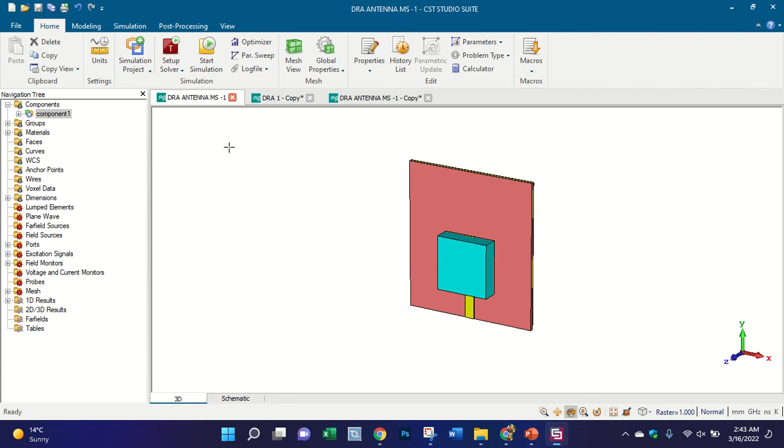Like Gerber viewer. Yes, yes, I have. Yes, thank you. I will share with you.

Okay, don't worry. Okay, so first let us see for which design I am talking about the patch antenna. Okay, let us remove these files. We open any patch file. Okay, so suppose we have this one. Okay, we want to import, sorry, export the Gerber file of this design.

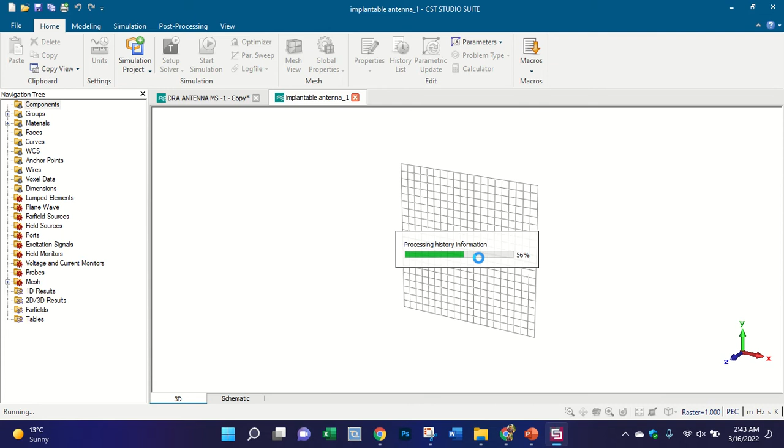Okay, so we have some options. Sometimes the fabricator will ask or will demand different files. Okay, so you need to provide what he wants exactly. Okay, so first, this is your antenna. This is your front view and this is your back view. Okay, so first you can reduce the skin, because we don't need skin right now.

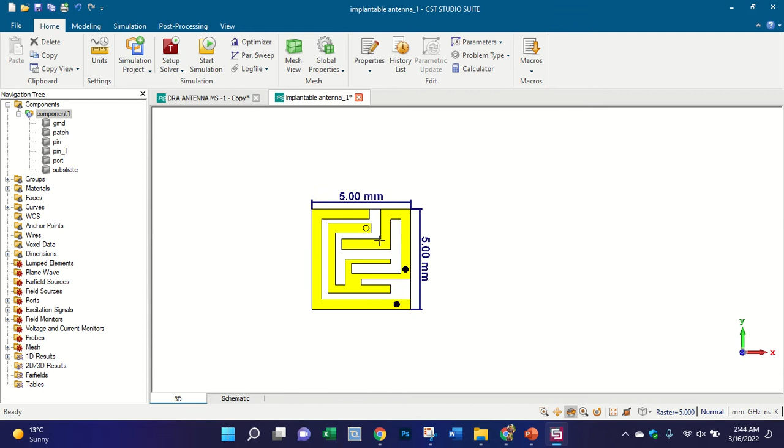Also the port. Okay, so you need to check where your port is. Your port is at this position, and your shorting pins at these positions. Okay, so when you want to send your design for fabrication, you need to do the following steps. You need to open the Word file or Excel file. You need to save your results. I mean, you need to explain your design first. Like, this is your shorting pin.

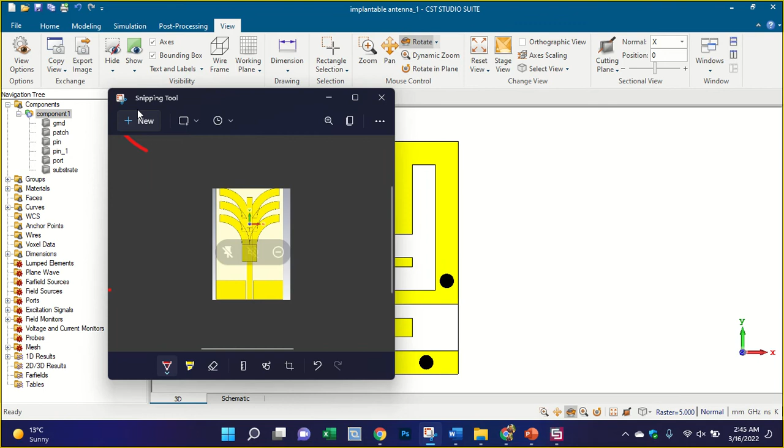Okay, pin, where is the pin, port? Yes. Okay, so this is the port. Wait a minute. Okay, so you take a snap of this design. Okay, wait a minute. Okay, so take snap, save results. I mean, this is the front view. You need to explain your design to the fabricator.

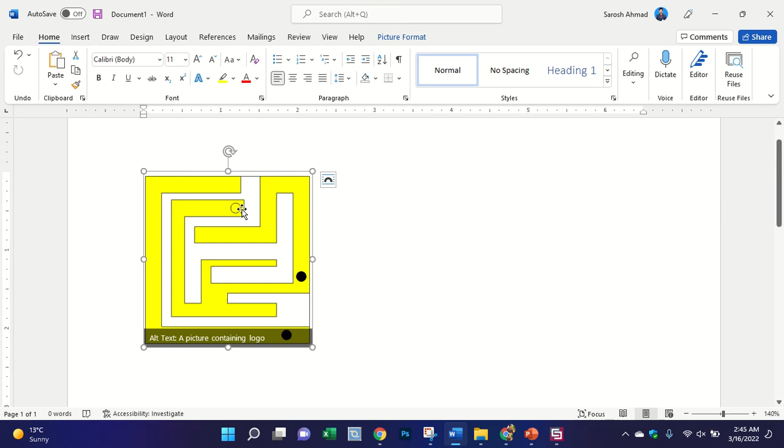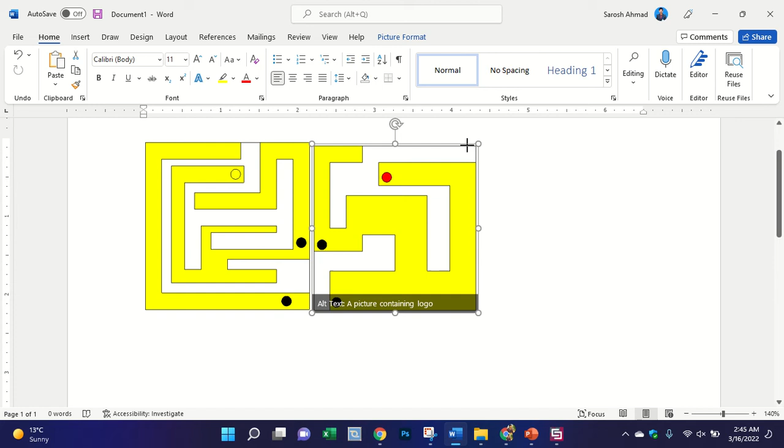To tell him that the black color are the shorting pins, and this one just change its color, like red color, to show him that this here is the port. Okay, so for the other thing you can also show him the back view. So first you need to explain your design in a Word file, to tell him that you have this design. Even if you send him the Gerber files, he cannot understand your design exactly. So better to send him a Word file, or sorry, PDF file separately to explain your design.

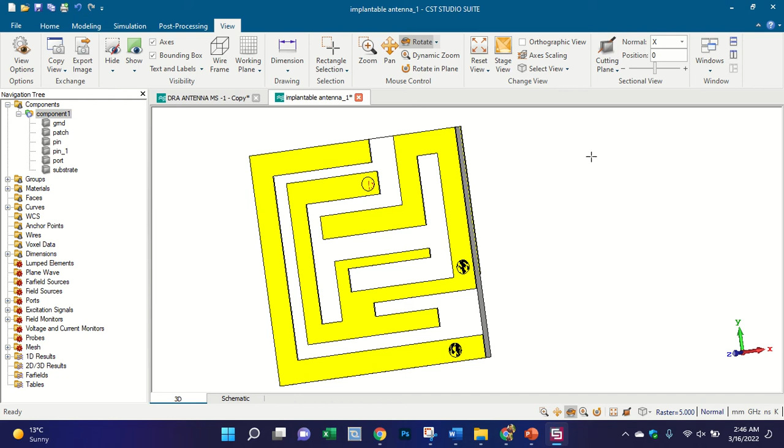Okay, so now we want to prepare the Gerber file. For that you cannot export the Gerber file of the shorting pins and the port. You need to remove the port, but if you remove it, it will not be visible. So it is better if you subtract the shorting pins and the port from the design. Like, you have this patch, you have a ground plane. Click on both together, then click the minus button on the keyboard, then select the port and the pins. Press enter and you can see there is a hole.

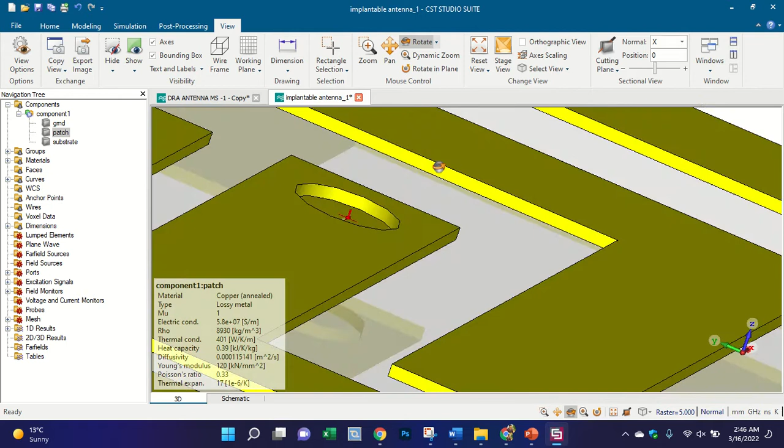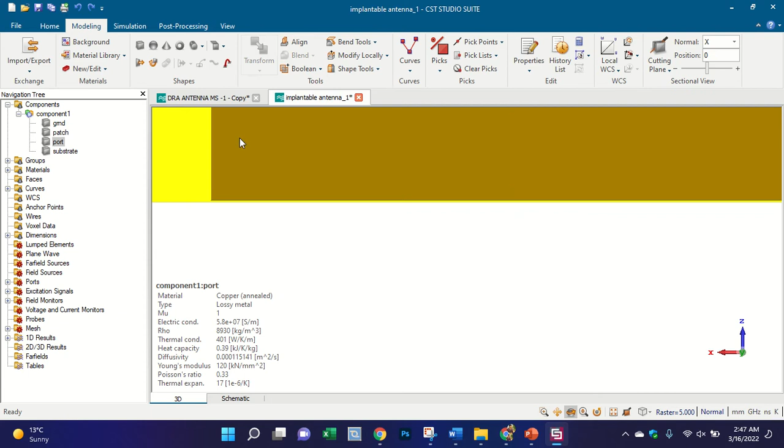Now you can see here in this case, this is not properly subtracted. So you can undo, press Ctrl Z, to subtract properly here. Okay, so this is the port. Let me check whether we are able to. Or you can even take any size you want. Okay, add both, press enter. Also make it thicker.

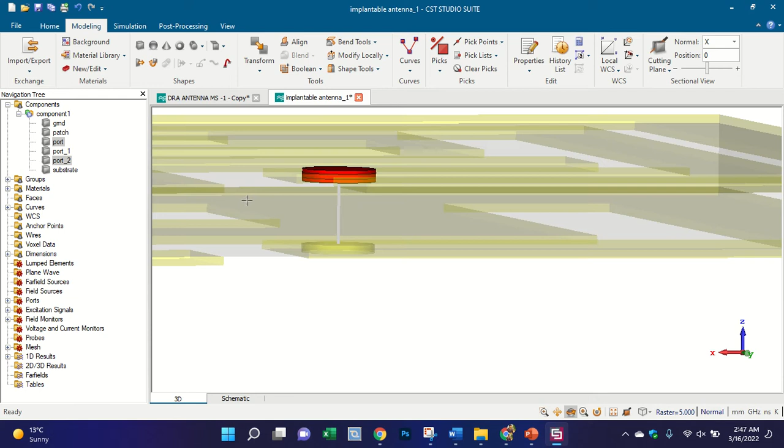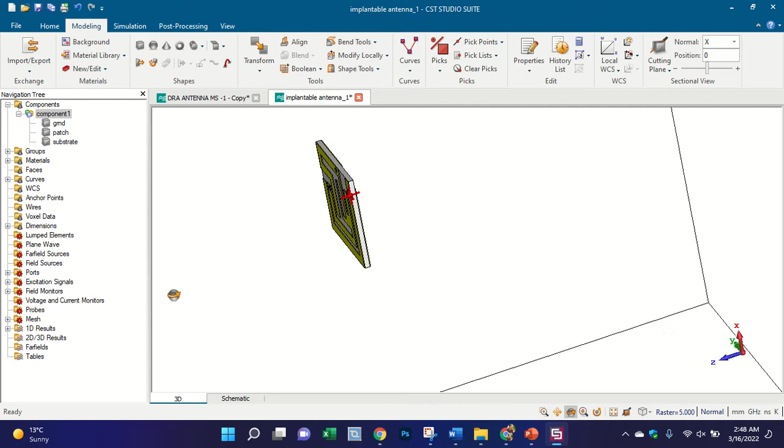Okay, so this is your shorting pin now. You can cut it from the patch and the ground. This is your patch, this is your ground. Select together, press the minus button, then select the port, press enter. So now you can see the hole in your design. Now you can explain to your fabricator that this is your shorting pin, these wires for the shorting pin, and this one for the port.

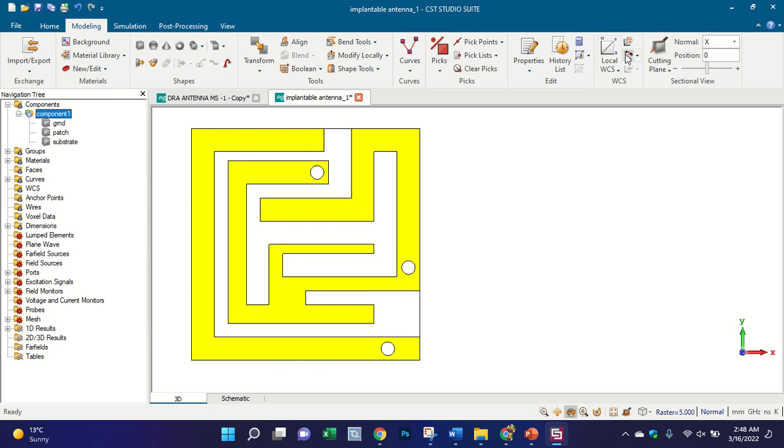Okay, so the next thing is that we don't need a substrate here, so we can even remove the substrate. But you need to align your WCS at the center of this substrate. Now go to import and export. We need export. So we can go to the 2D files. Some fabricators ask for DXF files. So you can click on it and press enter, and you can see the outline.

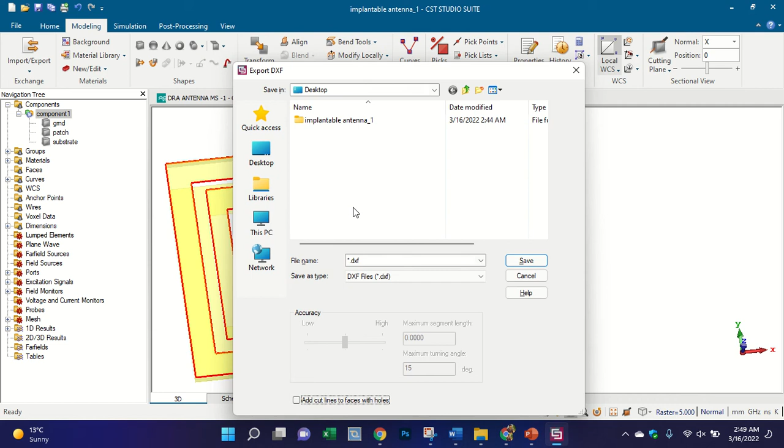This is the front view of the patch. So you press enter and then save in the desktop. Like, what is the name, implantable patch. Okay, so this is the front. You can see this is the front. Press enter and now go to the back side, and select the ground plane. And select export the DXF file.

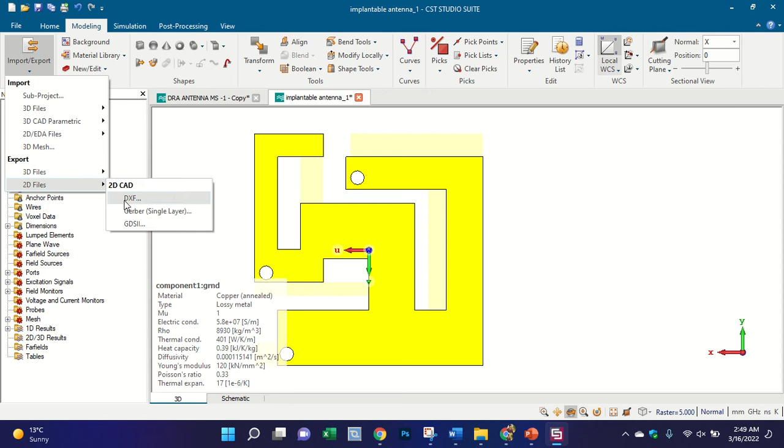Okay, and right here, implantable back. I have AWR software, that's why you can even see the DXF file. Okay, let me check the front view.

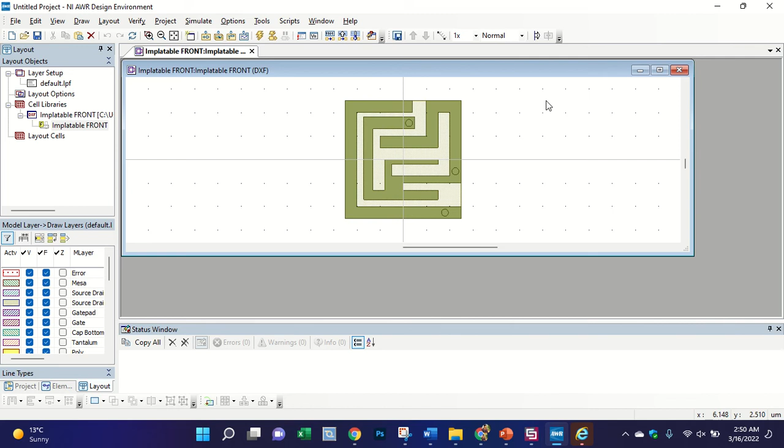We need to delete the substrate or we can hide it? Yes, let me explain, wait a minute. So this is your patch. You can see here, in the DXF file it is okay, no need to remove the substrate. But in the case of the Gerber file you need to remove it. Okay, so DXF files are easier than Gerber files.

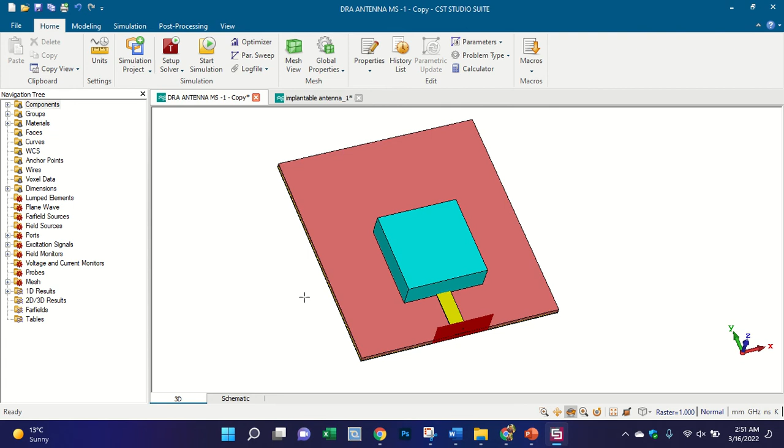One more thing: suppose this is your patch, and your patch is at the center of the substrate, meaning your patch is not the same size as the substrate. In that case you need to create a boundary for the fabricator, so that he can easily understand the size of the antenna.

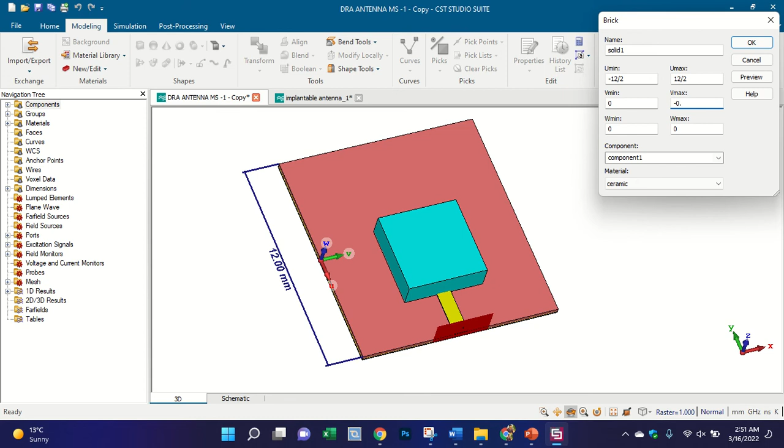Like you see, the length is 12 millimeter. So you need to create a boundary here, minus 12 by 2. You need to create a boundary of very less thickness, minus 0.05. So this is your boundary, with copper or any material you want. You can see here this is your boundary.

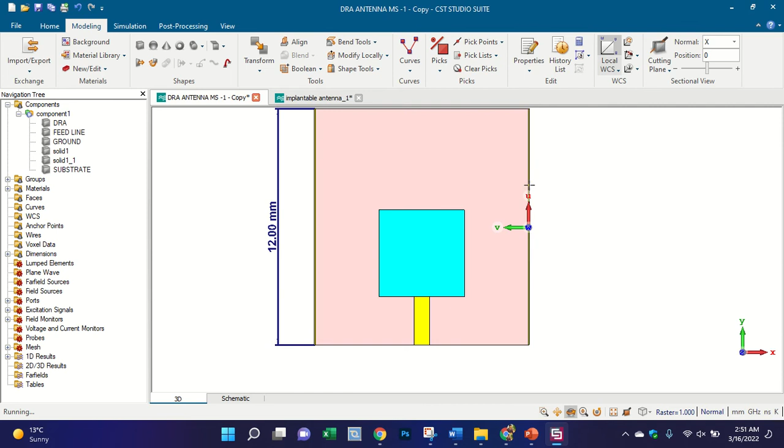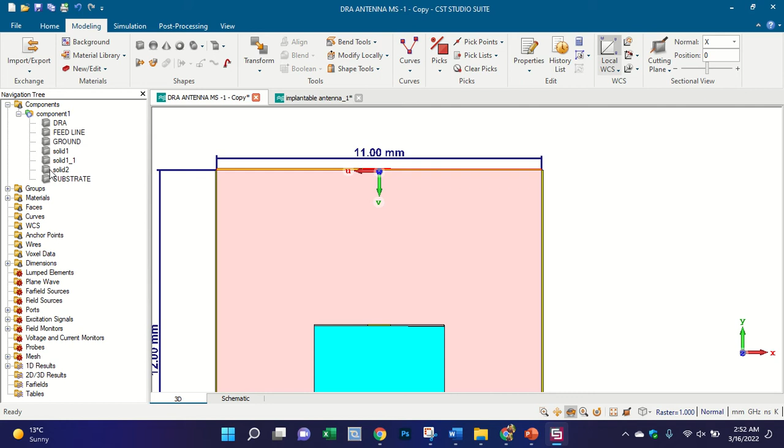And also you need to paste this boundary to create a complete boundary. Copy this and paste here. And also create a boundary here, 11, minus 0.05. Also copy this one and paste down. So you see, you have a boundary now.

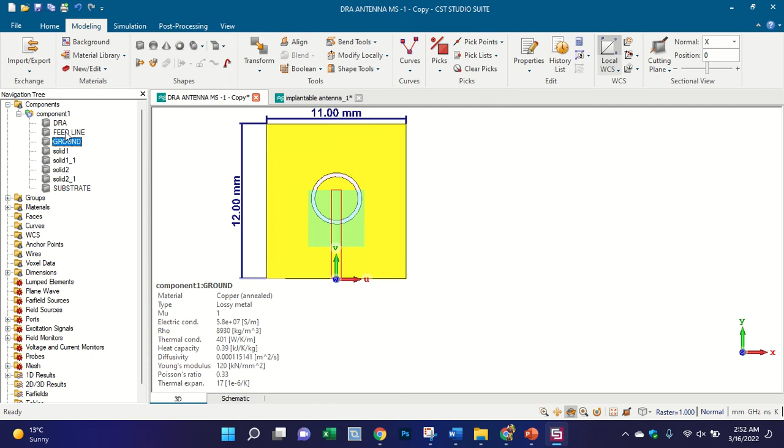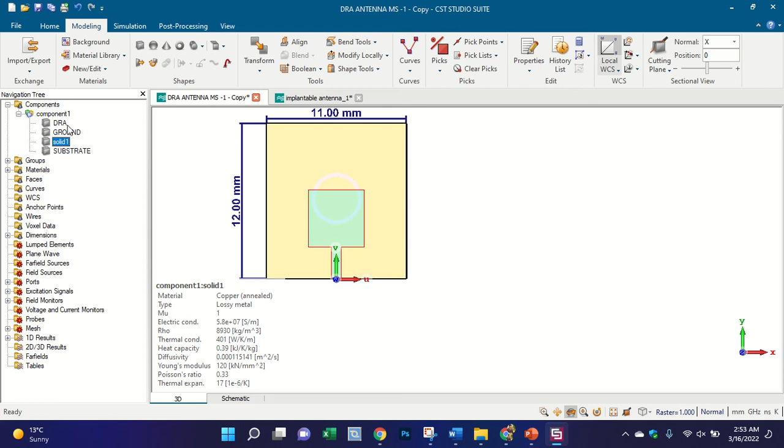Now what you need to do is select the boundaries, add all boundaries, and select the DRA. So just select this one. You see, I did not select the ground plane and the substrate. So you can export the DXF file or Gerber file.

You can see this is your patch with the boundary. So in that case the fabricator can easily understand the size of the antenna. So whenever you send the design, you need to ask the fabricator first whether he needs the design with the boundary or without boundary.

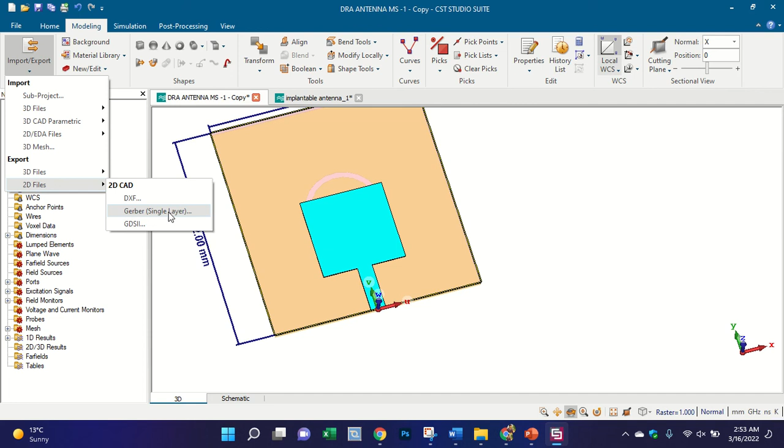Now we export the Gerber file. This is the Gerber file. I click on it and press enter, then go to the desktop and write here patch. So I added this one. In most of the cases I delete the substrate, because it gives some errors. So let's see this file in the Gerber view. When you see the Gerber view, maybe you see some errors. Yes, I will send you this file, the Gerber view.

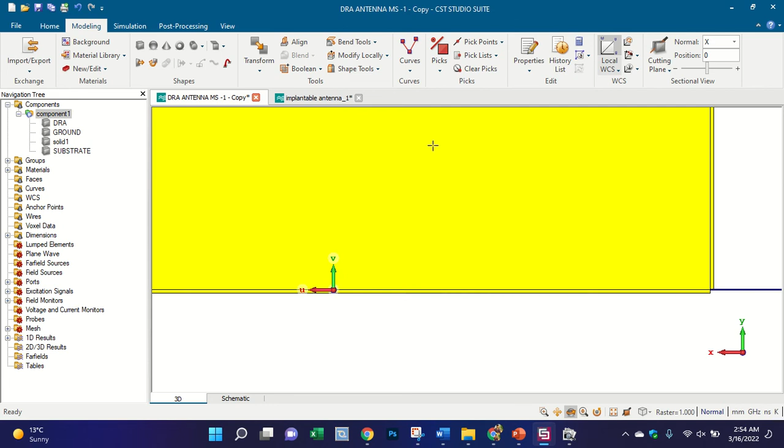We also export for the bottom view. You see there is already a boundary, so we don't need to create a boundary here because the ground is the full size of the patch. Press enter, and ground. Now go to the Gerber view. This is your Gerber view. I will send you this file; no need to install, it runs directly.

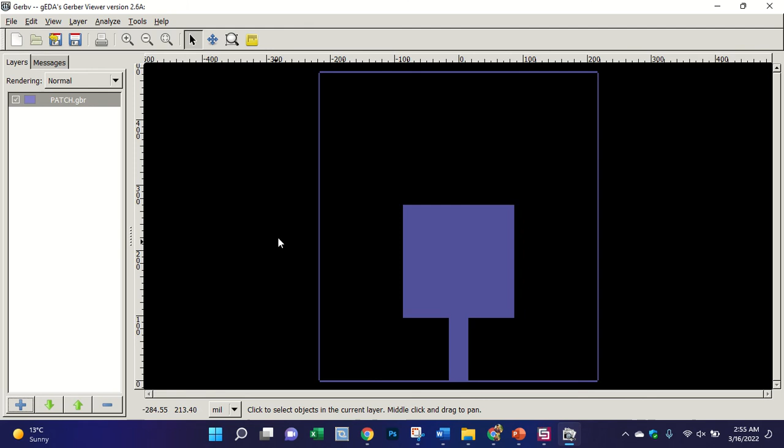So you need to go to the desktop and look for the file. This is the ground, and where is the patch? This one, patch. Double click on it and you can see here the patch. Now you want to import the ground plane. Where is the ground? This is the ground. So you can see here this is your patch and ground.

Actually, some people do different kinds of fabrication. Some people do fabrication with machines. In my university a machine is available for fabrication; I think the name is LPKF. Some people like to fabricate the design with the chemical etching method, a local method. So if you are sending the antenna to fabricate with machines, you need to send him the DXF or Gerber files.

But for the chemical etching method, you need to do something like this with your patch, because with the chemical etching method you cannot directly fabricate the design. The chemical etching method is very simple; most people like to fabricate at home. They make a photocopy or print of the antenna on a special paper, A4 size.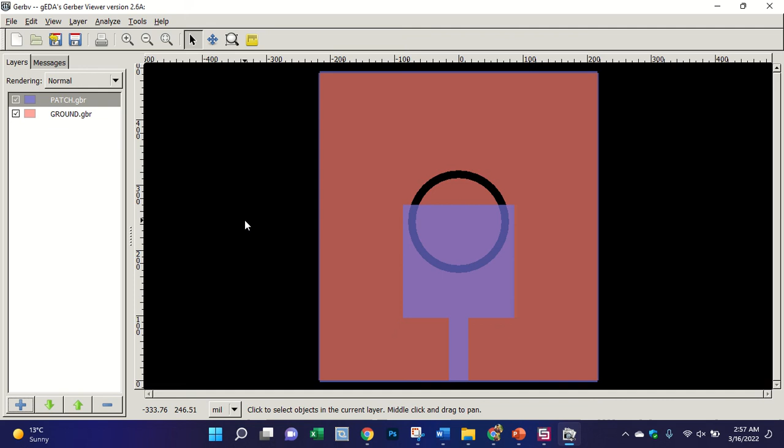Do you have a video for this local method? No, I don't have the video, I did not make one, but I will tell you the way. It is very simple. What is the process? So you need to make the design completely black color, and change the background color to white, like this.

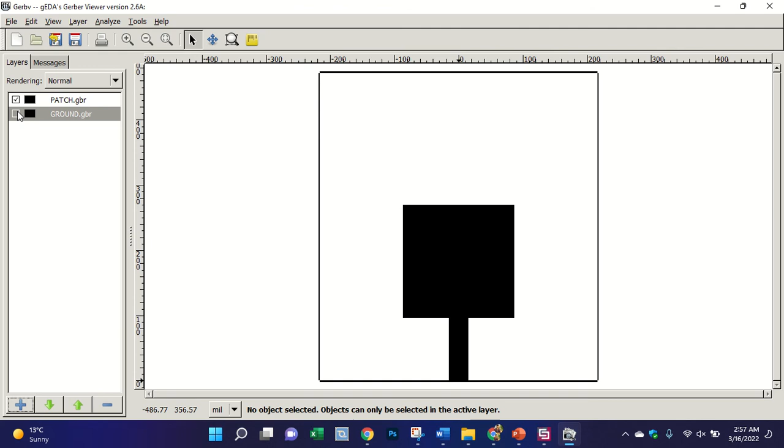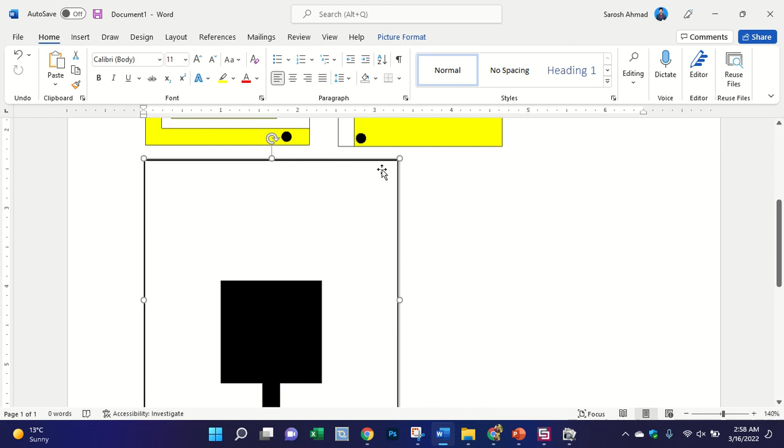Okay, so this is your front view patch, and this is your ground. So for the patch you need to take a snip tool of the complete antenna boundary, like this. So I have taken this one and I want to paste here. The fabricator will print this antenna and paste it on the PCB, like FR4 and others. But he will take the print at the same size as on this page, so for that reason you need to keep the size of the antenna the same as in CST.

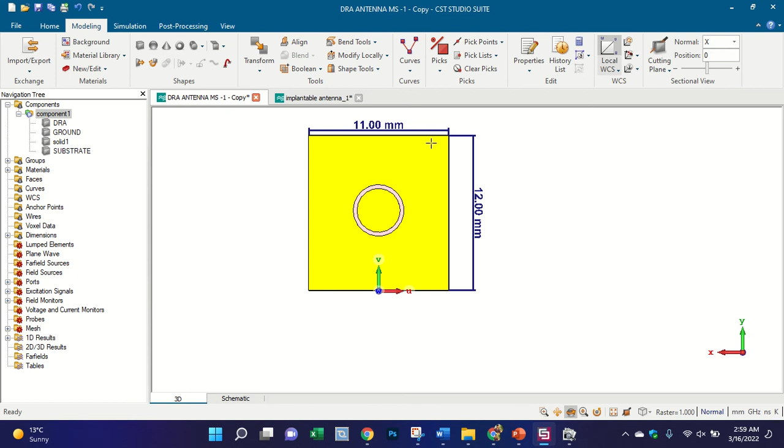So how can we take the same size? Let us also do it with the ground and then we do it. Okay, so this is the ground plane. Now we take the size. What is the size of the antenna? The width is 11 millimeters and the length is 12 millimeters. In the Word file, convert 12 millimeters to inches. Word doesn't understand millimeters, so you need to use inches. So the length is 0.47.

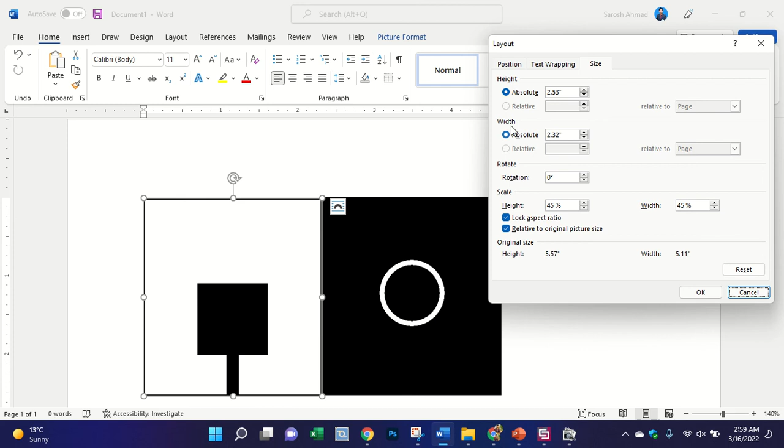Copy this one and go to the Word file, right click on it, and go to size and position. This is the width and this is the height. We use the height, and it automatically sets the width. You can set either the width or the length. Okay, so this is the actual size of the antenna after fabrication.

You can export the PDF file and send it to him, and then he will print this file and use the chemical etching method to print this antenna on a PCB. They print this antenna on paper or what? Yes, they print with special paper. I forgot the name. Kind of transparent paper? Yes, transparent paper, but special. In Arabic it's called calc paper, I don't know it in English. It's the paper architects use.

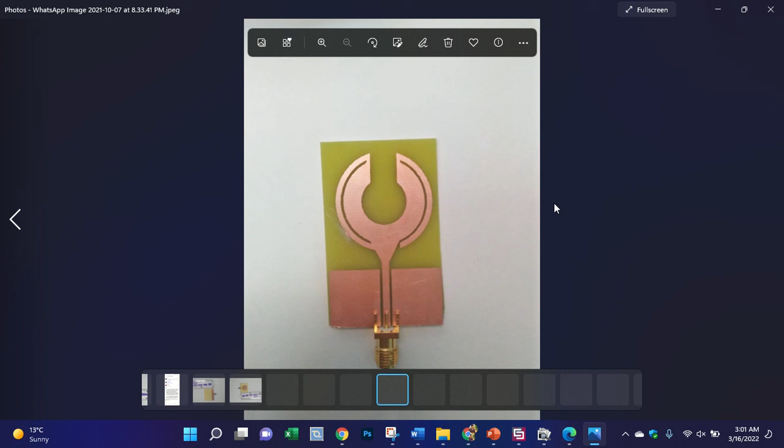I will show you the chemical etching method. These designs are all made with chemical etching. I did it once; it's not good, and sometimes the quality of the antenna becomes poor. Actually, it depends on the experience of the fabricator. In my case, I have a fabricator with much experience. You see, he fabricated with chemical etching. Very nice this one. He has much experience, that's why he can fabricate any design. You can see his quality is very nice here.

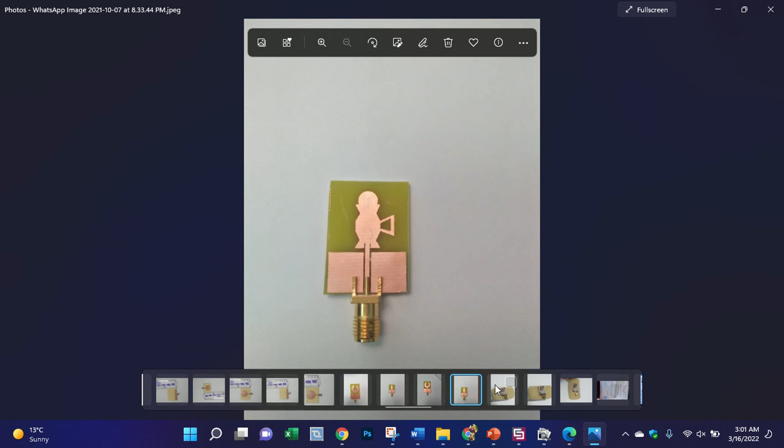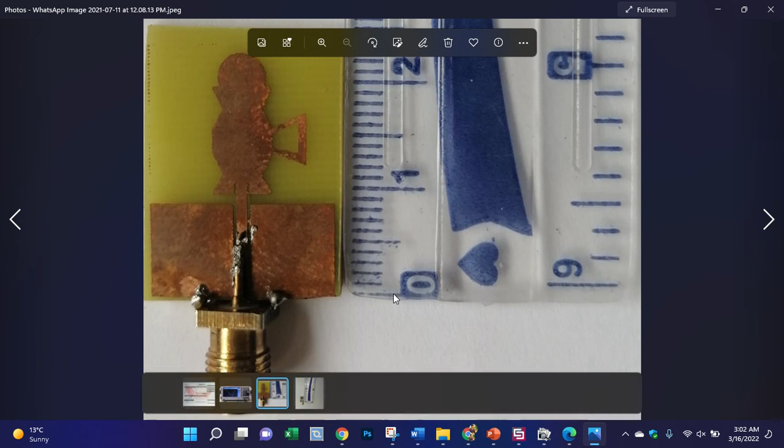This is with chemical etching, even this design. Machine will mostly be very perfect. Yes, machines are perfect, but he does fabrication with chemical etching. He's a good fabricator. I want to ask: can any substrate stand the chemical? For FR4, yes. You see, it's the same design, and with chemical etching the color of the copper has changed. This is the same design I showed you.

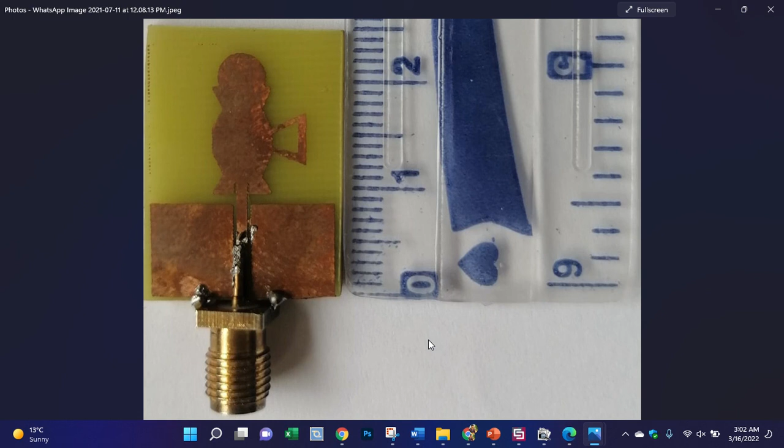But if you keep this design for 1 or 2 days, the color changes. This is just after fabrication, and this one is after 1 day. Yes, it's always happening. What is the reason? The results are okay. I published this paper; right after he finished, I took a photo. Yes, it's okay to take a picture immediately. But one I made by machine maybe 1 year ago still has the same quality.